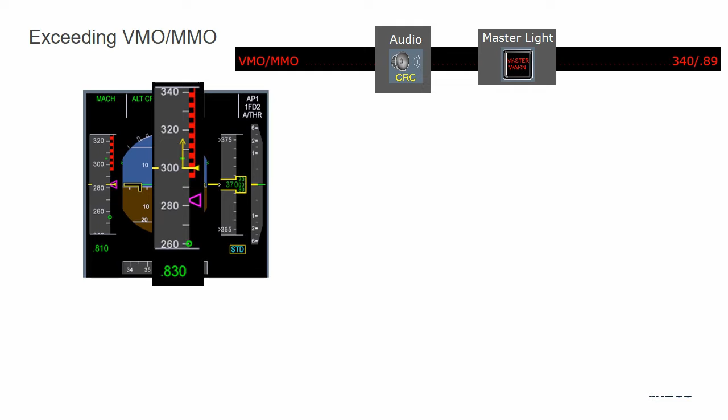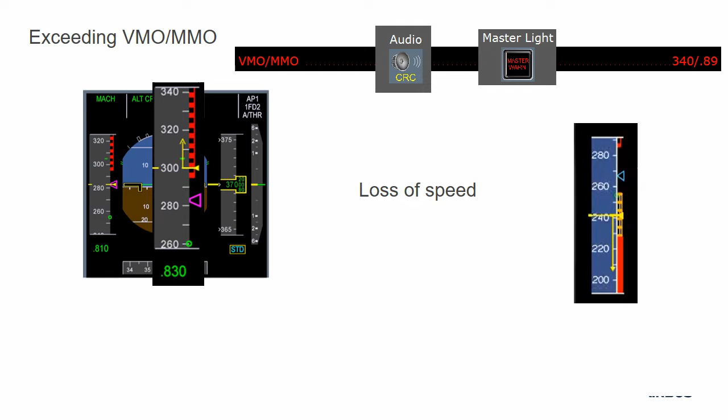By energy management, we'll talk about the most significant one, the VMO-MMO exceedance that the flight crew can easily notice in the cockpit by ECAM warnings and a speed variation. Also, this energy change could be a loss of speed that the flight crew can also notice on the airspeed.

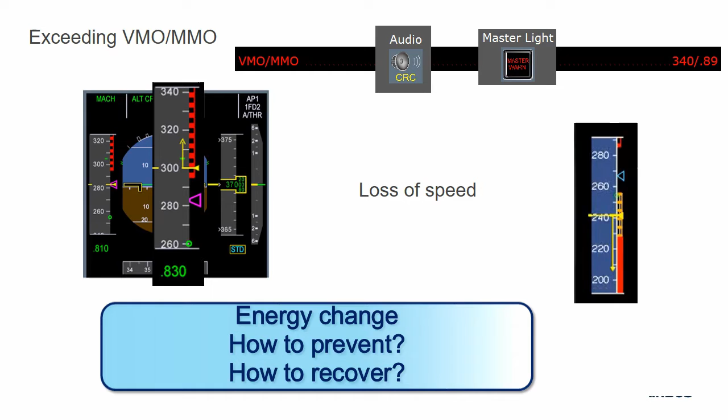In the first part, we'll have a look on the VMO-MMO prevention and recovery. In the second part, we'll talk about speed decay, and we'll finish by reviewing some recommendations on training and operational aspects. So let's start by overspeed prevention and recovery.

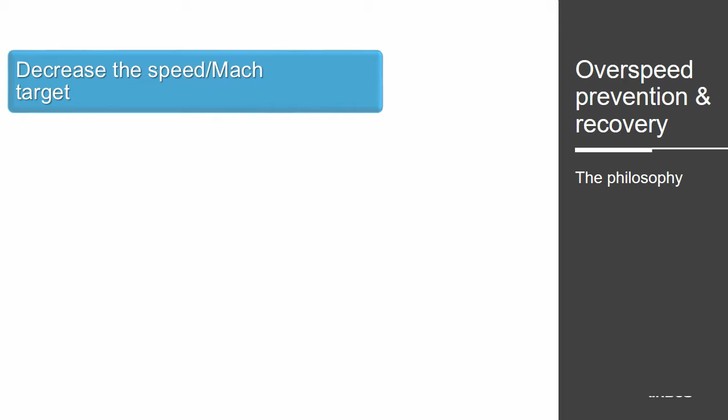Let's have a look on the overspeed prevention and recovery and its associated philosophy. The first step of this philosophy, when you experience an overspeed, is to first decrease the speed and the Mach target. The second aspect of this technique is to increase the drag. These two steps should allow to prevent from overspeed situation.

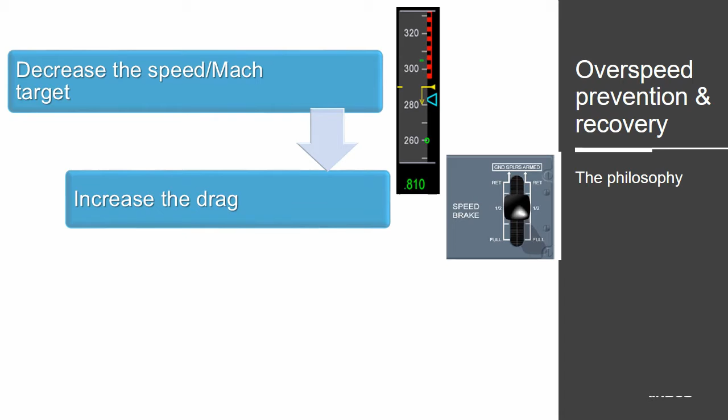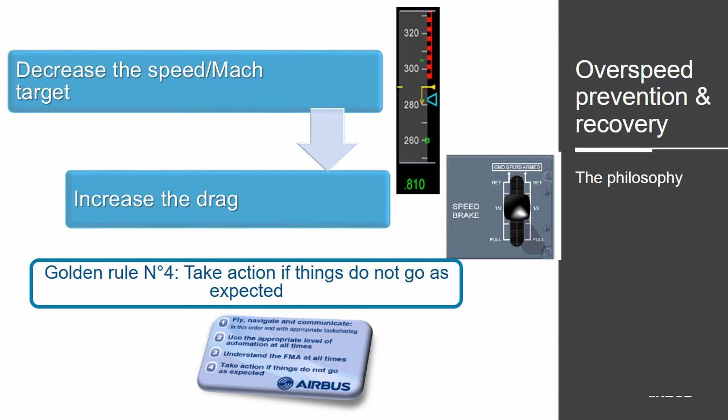If not successful, the flight crew may have to apply the golden rule number 4. It's to take actions if things do not go as expected. That means that take over and recover from the situation.

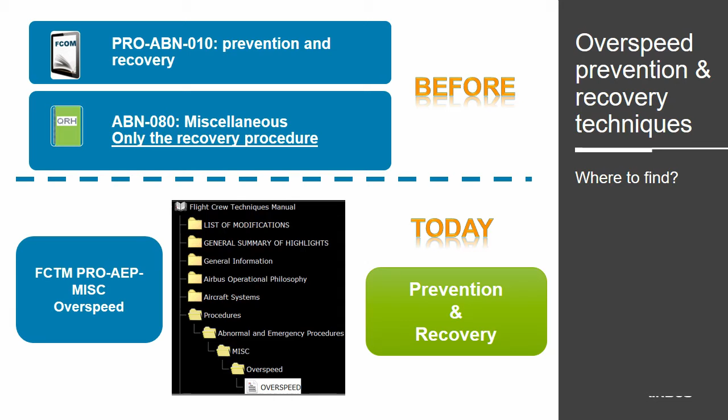Now, where to find these techniques? A few years ago, we proposed to have a look on the FCOM abnormal procedure part to read the prevention and recovery techniques to apply in case of overspeed. In addition to that, the recovery procedure part was presented in the quick reference handbook. However, it was not really adapted to the operations, so we decided to publish these two techniques in the flight crew technique manuals. In this FCTM, you can find the prevention and recovery part as a technique that the flight crew will have to apply by memory if an overspeed situation appears.

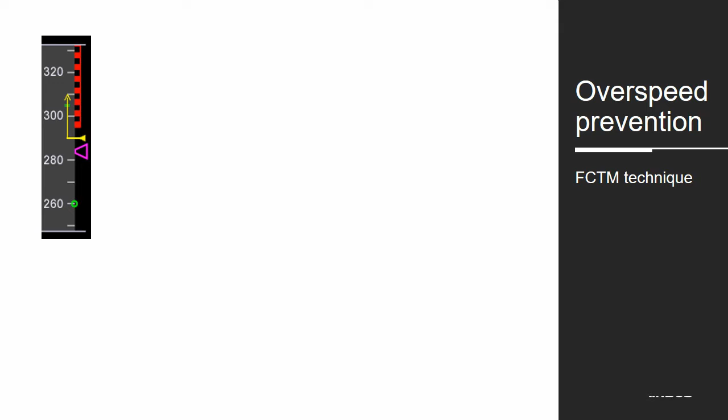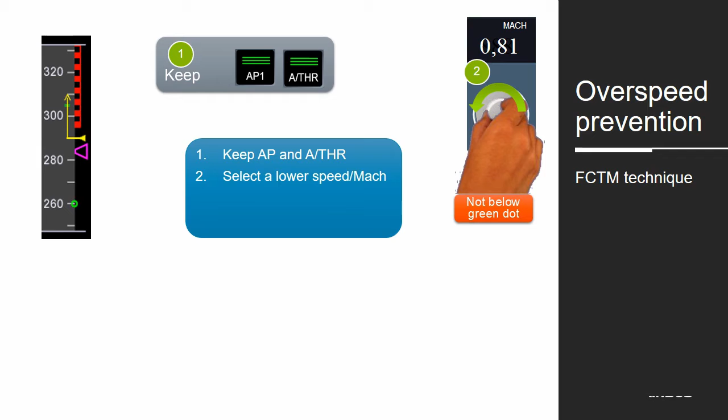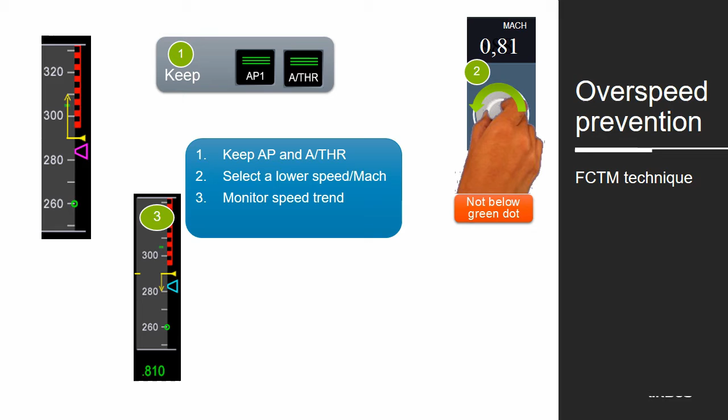Now let's have a look in detail on the technique. So first, the prevention. If the flight crew notices that the airspeed may fall into the red band and you will be in situation of a VMO, the first actions to do will be to keep the automation, autopilot and auto thrust. The second step to apply will be to select a lower speed and Mach, for sure, of course not below green dot, to slow down the aircraft. The flight crew will have to check if the two first actions are successful. If not, the speed brake extension will be possible to increase the drag.

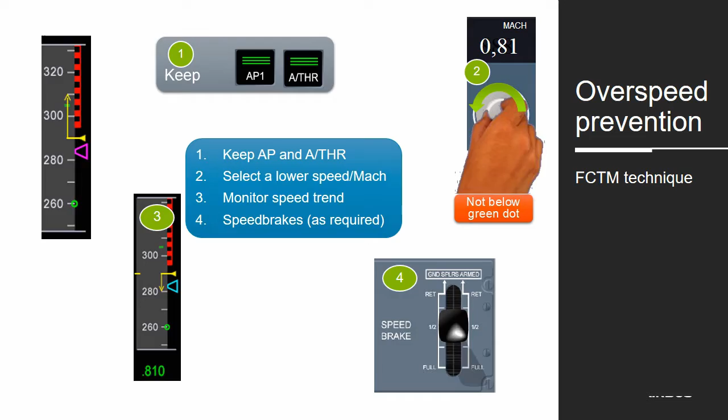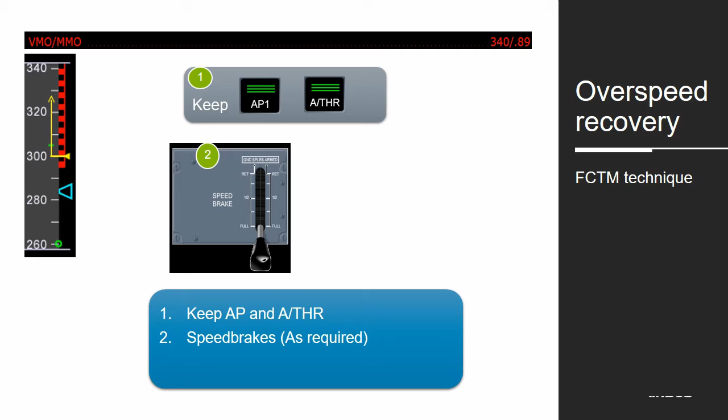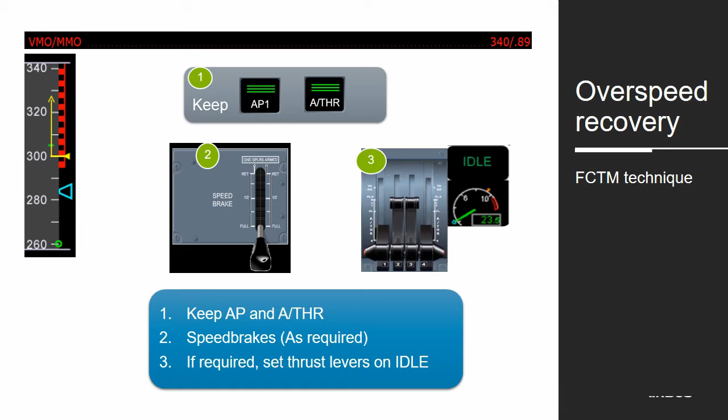In the case of the prevention was not successful, the aircraft will enter into a VMO-MMO situation, and the first actions that the flight crew will have to take is to keep the autopilot and the auto thrust if already engaged. The second step will be to keep the speed brakes extended or even to extend full speed brakes as required by the situation. And finally, if required, the flight crew may have to set the thrust lever to idle to ensure that the engines are not accelerating.

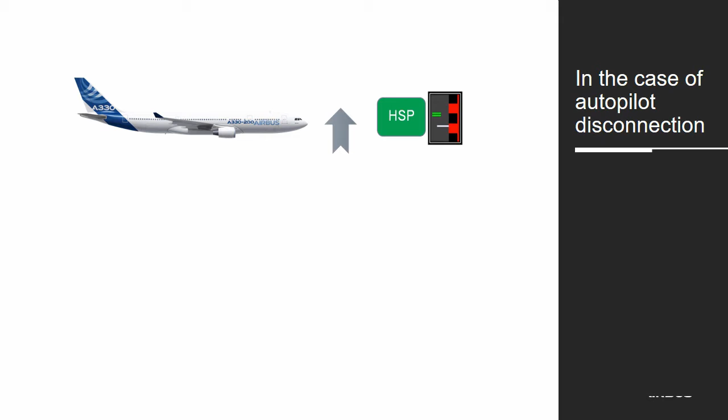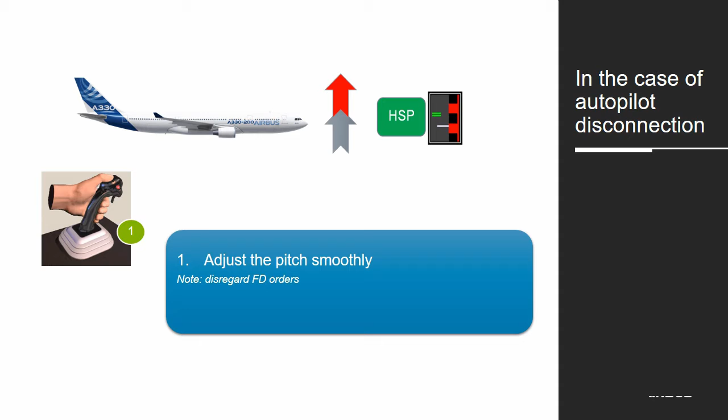In the case of the first steps of the prevention and recovery procedure were not successful, the autopilot will disconnect due to the high-speed protection activation. This protection orders a nose-up to slow down the aircraft. Remember, the autopilot just disconnected, so you are in control of the aircraft. In this case, you will have to adjust the pitch smoothly and be careful because your order is added to the pitch up order. The second step will be to keep the speed brakes extended in order to increase the drag.

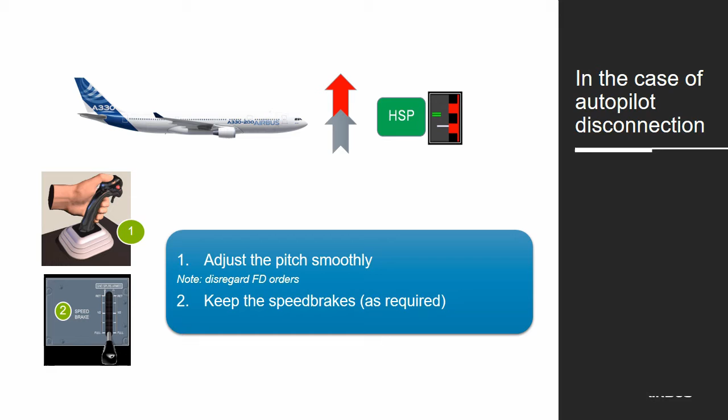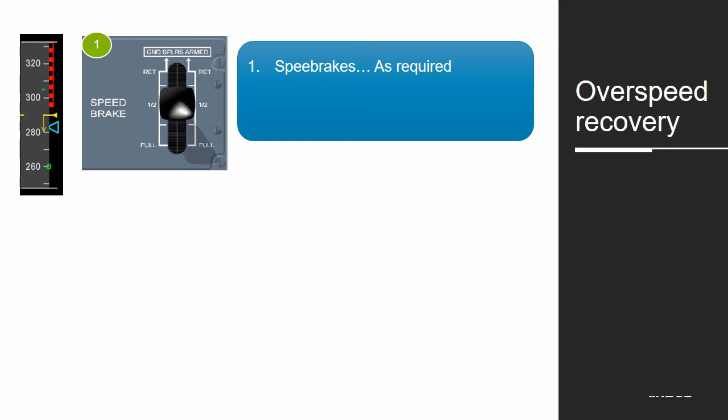Finally, when you recover from an overspeed situation, you will have to check the speed brakes and to retract them if required. In this case, you will have to be careful because if your speed is still close to the red band, retracting the speed brakes could create a new VMO-MMO situation. The second step will be to select an appropriate speed target with a margin to VMO-MMO. If the autopilot is disconnected, you will have to recover smoothly your flight path, mainly if you are at high altitude by slow inputs on the stick. And finally, to adjust the thrust, and if the auto thrust was disengaged, to pay attention to the engagement of the auto thrust and the auto thrust target that you have selected.

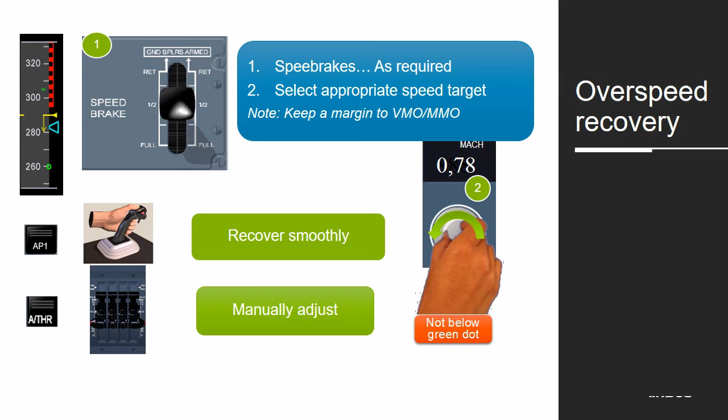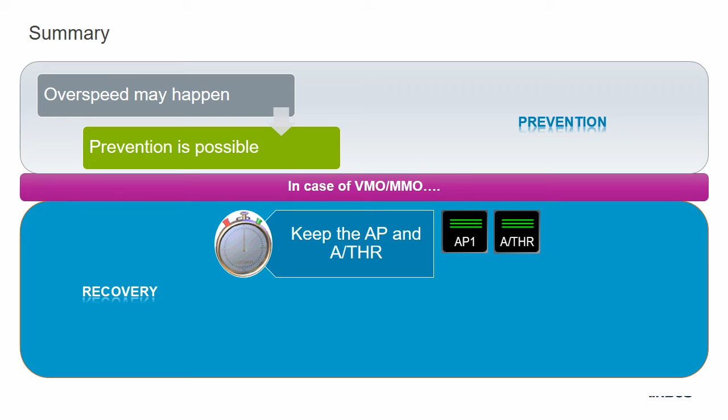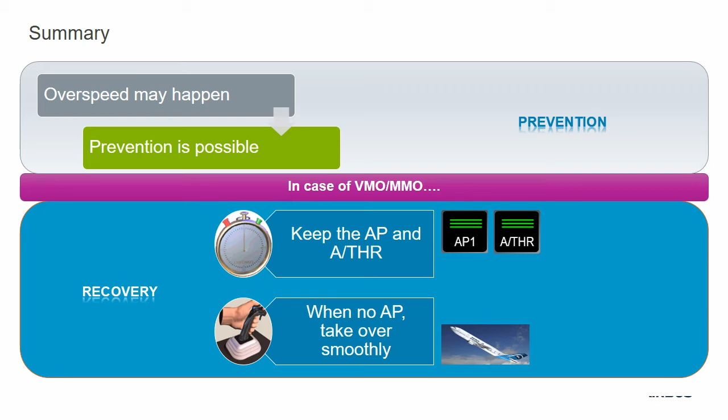So as a summary, overspeed may happen. It is still possible to prevent it. However, if it is not successful and you enter into a VMO-MMO situation, you have to remember two things to recover the situation. First is to keep the automation, the autopilot and the auto thrust. The second aspect is that if the autopilot is disconnected, if you have to take over, do it smoothly to avoid excessive pitch situations.

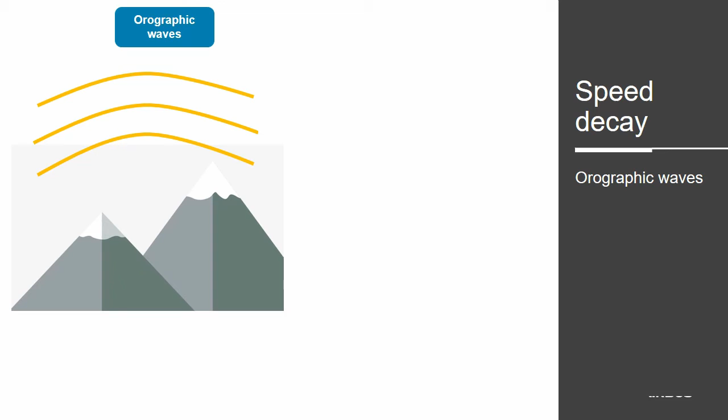Now let's have a look on the speed decay. The speed decay is a phenomenon that could be due to several things. First, the orographic waves, we'll see an example just after, and the associated downdraft. Another case of speed decay could be the jet streams and the tropopause change. Why this phenomenon could cause speed decays? It's because they have an impact on wind and temperature. We'll see in details some examples.

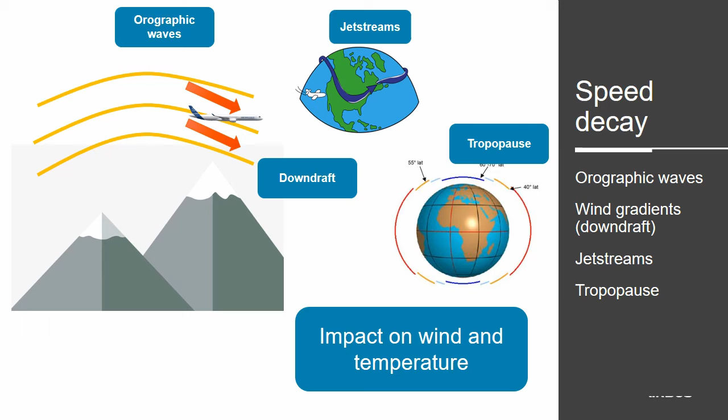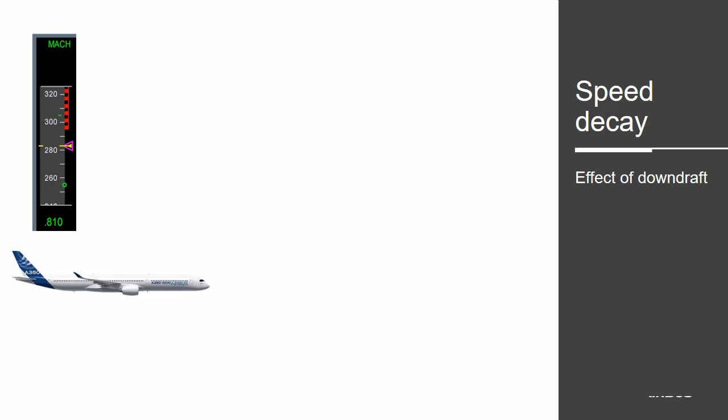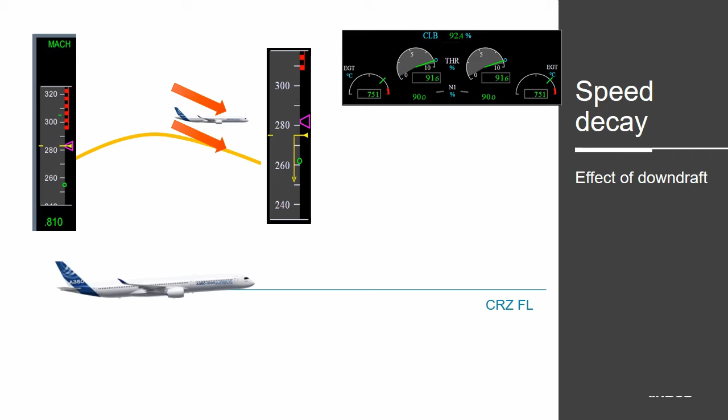First, the effect of the downdraft. If we take this scenario, an aircraft flying at a given flight level at a constant Mach, if the aircraft meets a downdraft, the speed will decay despite the fact that the auto thrust order maximum power at a given flight level, but the energy is not sufficient to maintain the cruise flight level. Associated to this pitch up order to recover from the cruise flight level, the energy is too low and the aircraft will descend and the speed will decay.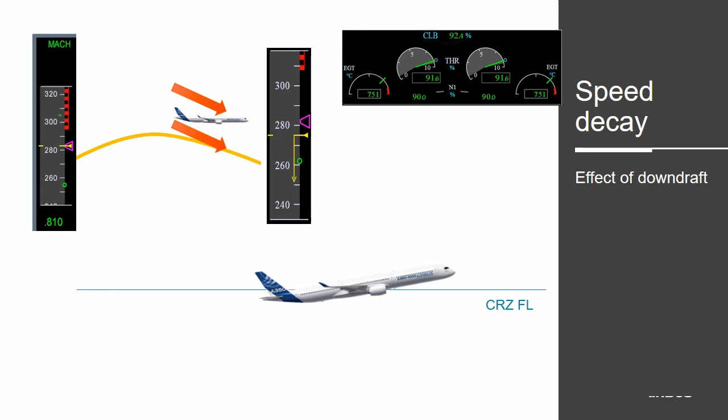Now let's have a look on the impact of the temperature. You should know these figures which modelize the energy of the aircraft. To fly at a given airspeed, a level of thrust is required, and a level of thrust is available depending on the flight level. The green dot here represents the speed where the thrust is minimum.

According to the flight level, the thrust available has a range. When flying at a cruise flight level, the thrust used is optimized to fly at a maximum speed, very close to the maximum of thrust available and the thrust required. According to the energy needs, the thrust required may vary, but it should remain in the blue envelope.

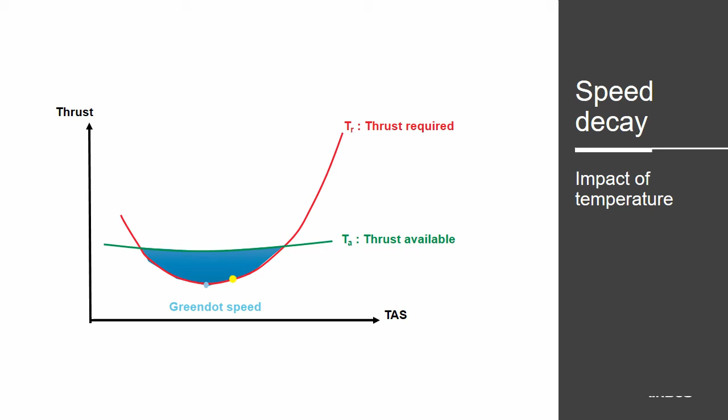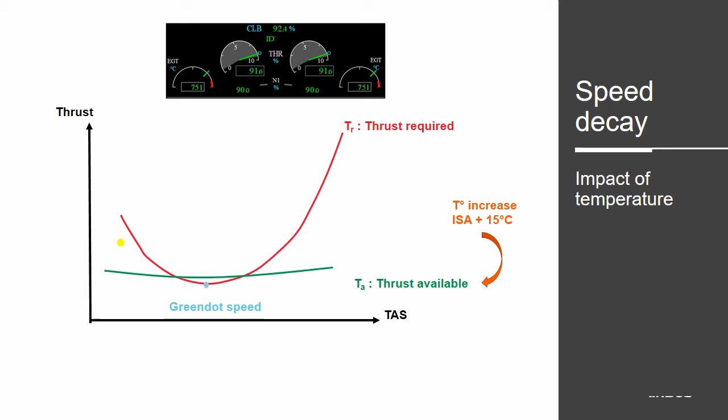Now, if we imagine that the temperature suddenly increases, the thrust available to fly at a given airspeed decreases, and the thrust available is lower. Therefore, the margin to maneuver in terms of energy is reduced. If we add to this phenomenon a wind gradient, for example, the aircraft energy may not be enough to maintain the current airspeed target, and in this case, the aircraft speed will decrease because the energy is not enough.

Now, if we have a look on the effect of the wind. If we take this scenario, aircraft in flight level at constant Mach, if an aircraft meets a jet stream, due to a heading change, for example, it could create a headwind decrease. In this case, the equation between the ground speed and the true speed changes.

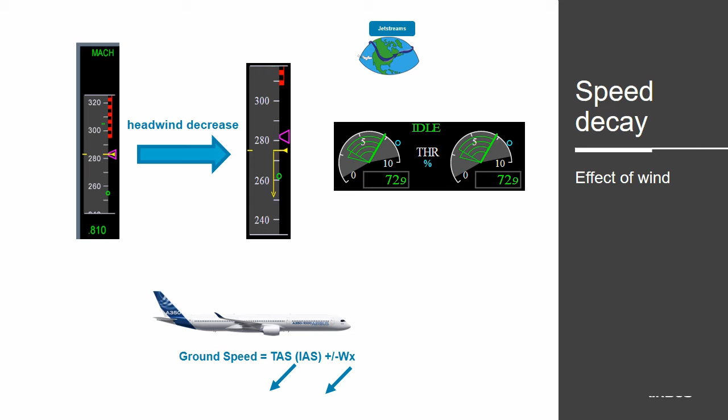The auto flight will try to compensate this energy change, and in this case will reduce the energy. In this case, the speed will automatically decay. So this is a natural phenomenon due to the jet streams.

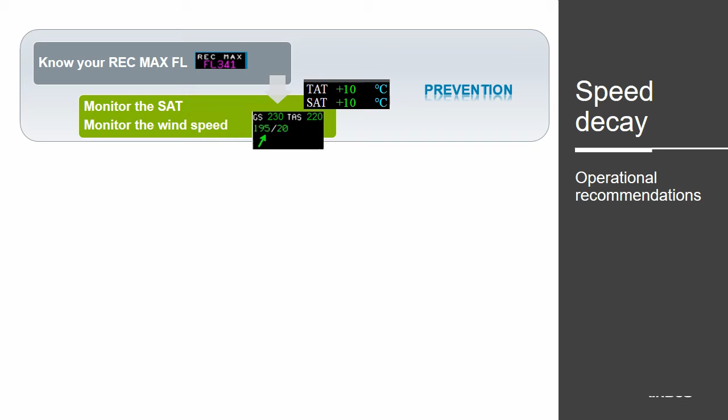So what to do in this case? The first thing to know and to prevent is to know your rec max flight level. The second aspect is to monitor the temperature and the wind speed as much as possible.

If the speed decay occurs, and even below green dot, the recovery action will be simple. As the energy of the aircraft is not sufficient, the idea will be to descend to a flight level to regain some energy. When it is successful, the idea will be to take some margin regarding the rec max altitude to be sure that the level of the energy of the aircraft will be enough.

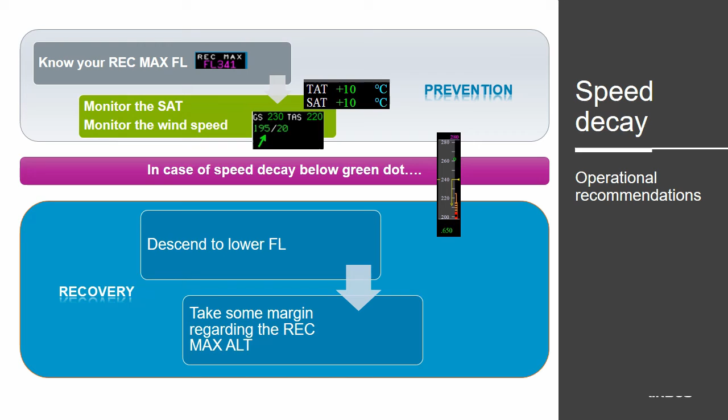Now let's have a look on some recommendations. As we explained, the weather conditions play a role on the energy change. It is possible to prevent it by preparing the flight, by reviewing the tropopause changes, the location of the jet stream, and the turbulences.

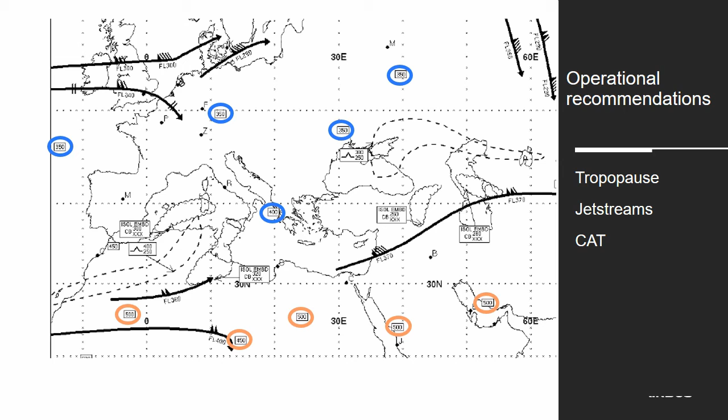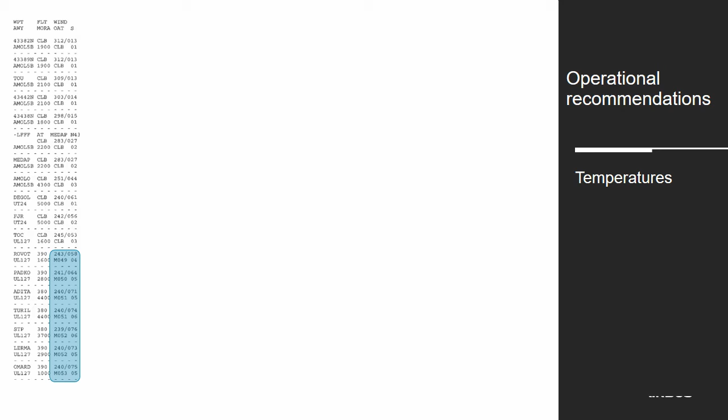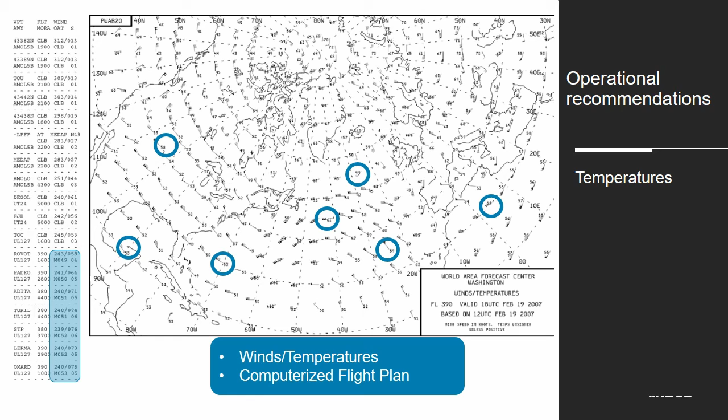Another point is to anticipate the potential temperature changes by having a look on the computerized flight plan and the waypoints where you can expect some temperature changes. You can compare these values to the weather forecast to be able to anticipate these temperature changes.

Another point is during the flight. It's not a question of anticipation, it's a question of preparing for the potential energy change by checking the cost index, having an impact on the aircraft energy, by knowing your rec max flight level, and by knowing at any time your aircraft energy, by monitoring the speed trend and your current thrust.

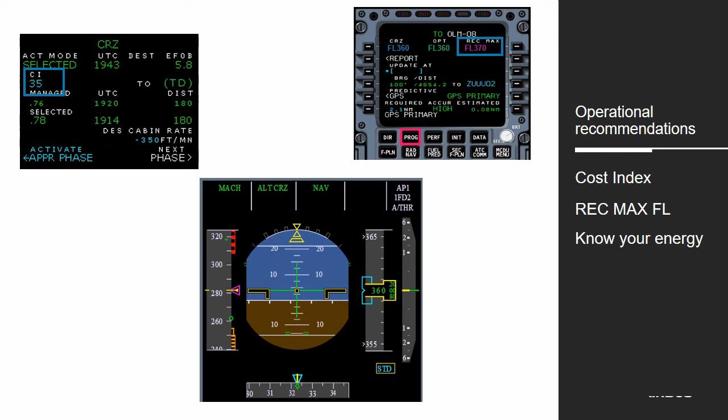How to find this recommendation in the Airbus documentation? In fact, you may have a look on the Flight Crew Technique Manual to have a brief on VMO situations and to prevent and recover from these situations.

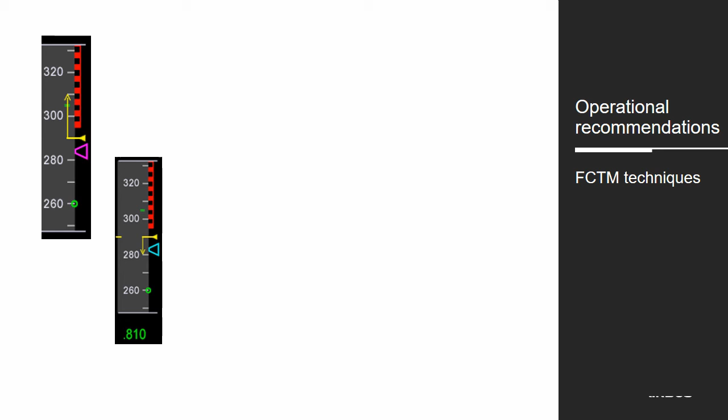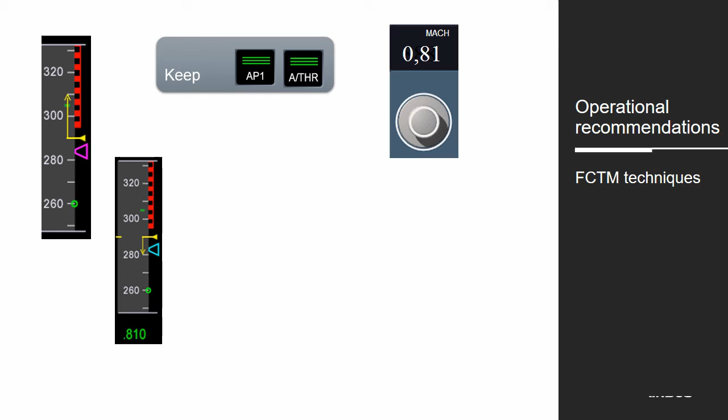In these techniques, we will remind what we have seen at the beginning of this presentation. So first will be to keep the automation, to increase the drag, and to control the aircraft by smooth inputs.

In this document, we summarize how to build an efficient training to prevent, to recognize, and to recover from sudden energy changes. So first, the idea would be to provide the trainees a knowledge level regarding the prevention and the recognition by briefing on the automation, the energy management, the flight envelope and the environment, meaning the weather conditions and their impact on the flight.

The second aspect that we provide is to perform an efficient training and to apply procedures and techniques to recover from the different energy change situations.

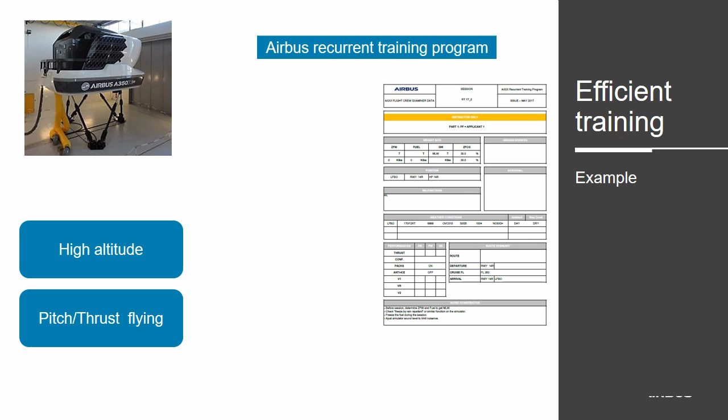By performing this exercise, we will ask also that the role of pilot monitoring is briefed, and the idea will be to monitor the flight parameters and to inform the pilot flying that something is happening. The other idea will be to reinforce the communication between the two pilots and to communicate on divergence on the flight parameters. And the idea will be to perform these exercises with and without automation in order to cope with all situations.

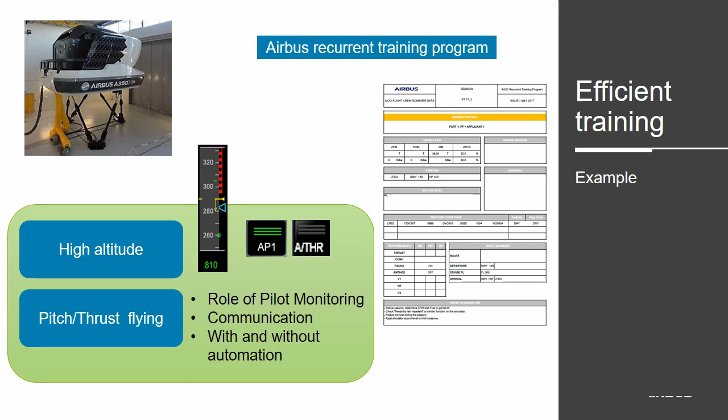So to summarize this presentation, we believe that the anticipation and the continuous monitoring of the aircraft energy is key to prevent sudden energy change and associated VMO exceedances or speed decay.

Airbus, we provide techniques to prevent and to recover from high and low energy states. Here we focused on VMO, MMO exceedances and speed decay, but we cover also low energy situations. Everything is provided in the flight crew technique manual. And finally, and also this is a key point, the training is essential in order for the flight crew to be able to prevent, to recognize, and finally to recover from divergent energy.